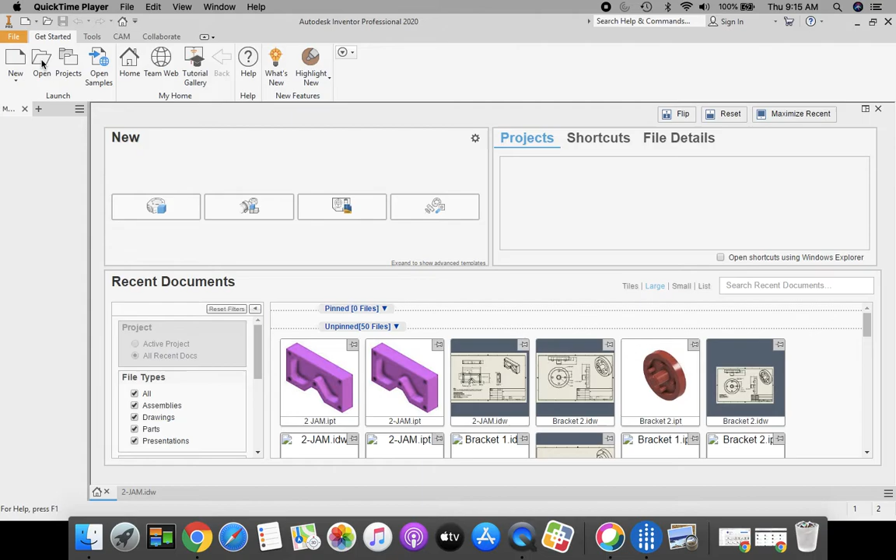Recently you just got done drawing and saving it, so we're going to have to find that in our H drive. We're going to come up to our ribbon bar and go to open. It should automatically go to our H drive, but if it doesn't identify it, come all the way down to the bottom. You want your first initial, last name, 000, that gray box with the green line underneath selected for our H drive. Scrolling down towards the bottom, we should find our 2-jam part in there, and we're going to click open.

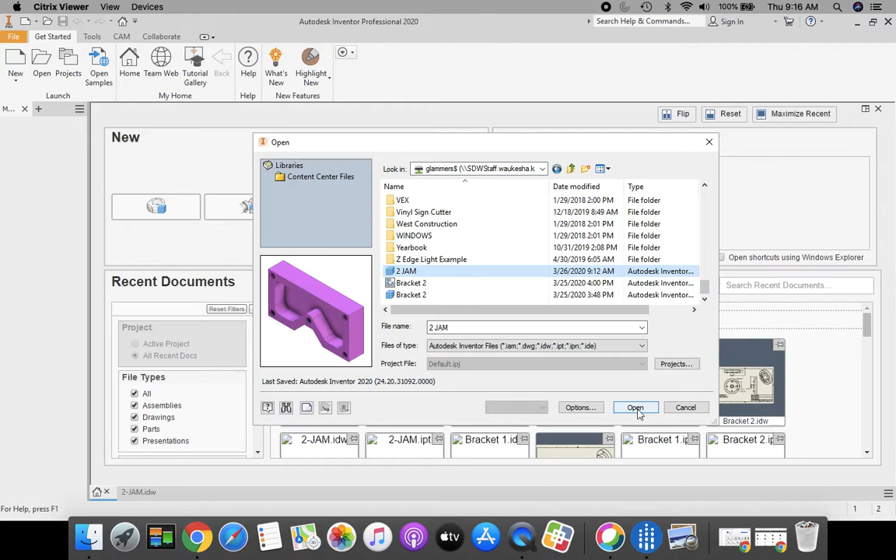Once it opens up, this is the part we just got done drawing. We're going to switch over to our CAM tab. If you look up here at the top above our ribbon bar, we are on our 3D model tab right now. We're going to come across to our CAM tab.

Once we're in our CAM tab, the first thing we need to do is set up this part for cutting, so we're going to go to our setup folder. Each one of these tabs we're going to work across from left to right, and in each tab we're going to take a look at the inside and the things that we need to change.

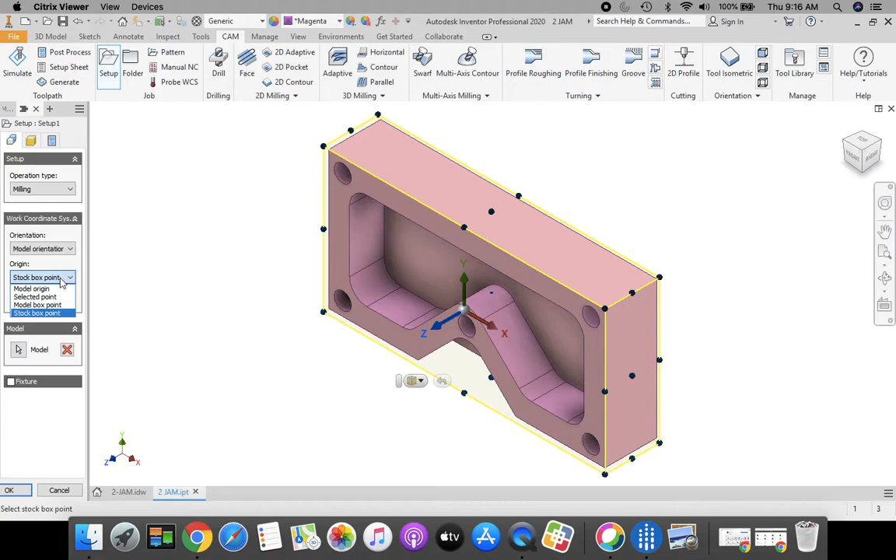In our first tab on the left hand side, we need to change our origin. You see that our origin is identified in the middle here, so we're going to change it from stock box point to the model origin. That throws it down into the lower left hand corner where we're starting for our origin on our part.

Next we're going to move across to our stock tab. Do you see how this box is outside of our actual model area? So we're going to change the stock offset mode to no additional stock, and that brings it right up close to the edge.

Then we're going to change over to our third tab for post-processing. We're going to highlight the area that says 1001, and you're going to enter in 2-jam as the name of the part, and then your last name. So 2-jam and your last name. Once you're finished with that, select OK from the menu at the bottom.

Next we're going to take care of these holes first and drill these holes. In order to do that, from our menu we're going to select our drilling operation.

Once again, these tabs we're working across from left to right, and each tab from top to bottom. So let's go to our tool. We need to select our tool.

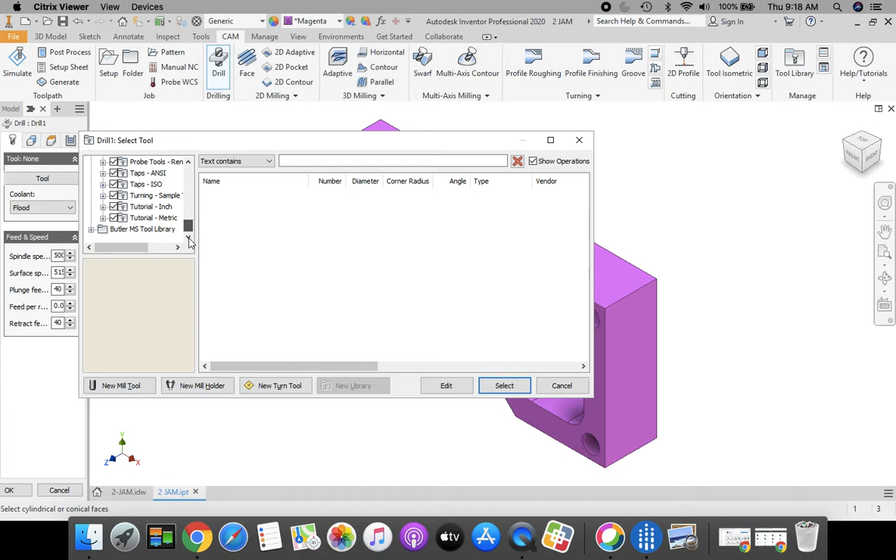Earlier this year we entered into a folder, and we have this Butler MS tool library. I scrolled all the way down to the bottom to find it. If you don't have this entered in here, not a big deal. You go back up to the top and you want to find sample libraries and go to end mills, and we're going to select tool number 2, 1/4 inch flat end mill. For those of you that do have the Butler MS tool library, same thing is in there. We want tool number 2, 1/4 inch flat end mill, and click select. That shows our end mill ready to cut our part here.

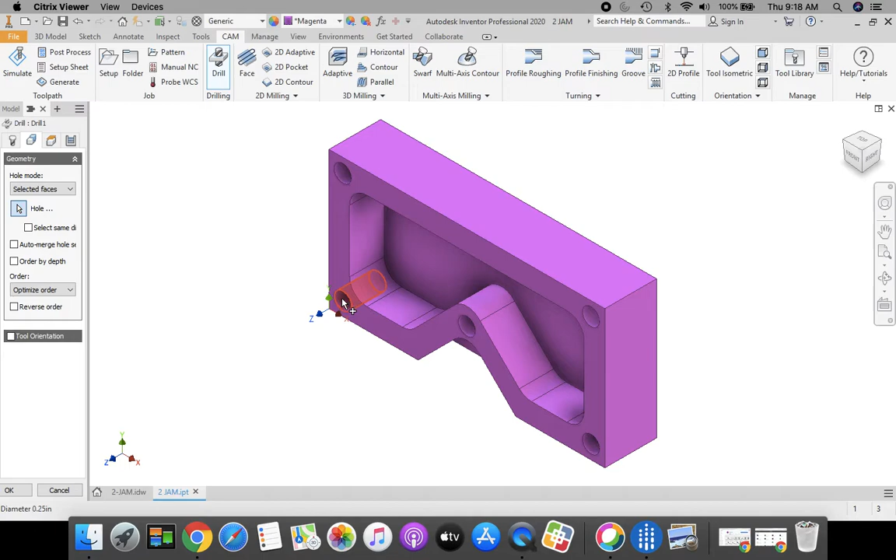Next, tab over, we're going to select our geometry, and for drilling we're going to select each one of these holes. It doesn't matter which order you click them in, because right here it says optimize order, so the computer is going to actually cut them the way it feels is going to take care of them the fastest. So we'll leave it at optimize order.

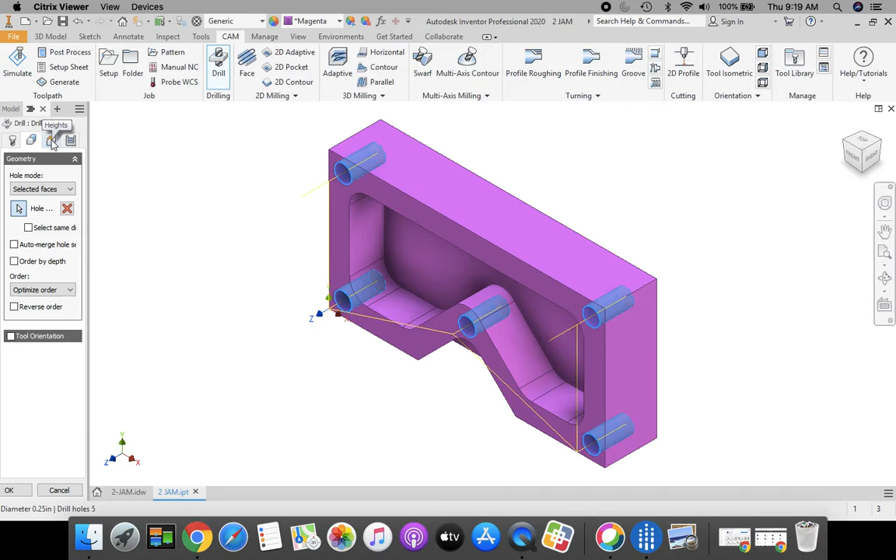Third tab over, we're establishing our heights. These top 3, I'm going to expand this a little bit so you can see: clearance height, retract height, and feed height, we're going to change all of these to model top and 0.2. Doesn't matter what they have in there right now, we're just going to change them all to model top and 0.2 for the offset.

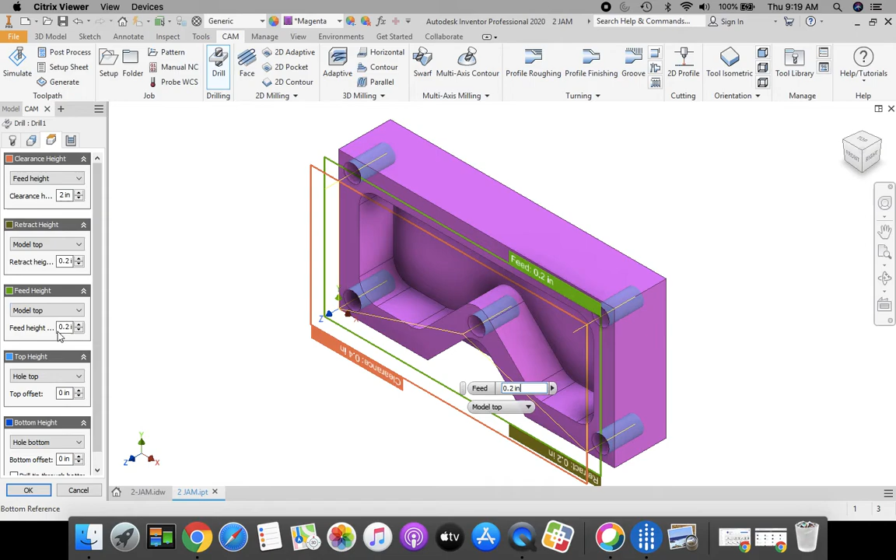Next, move on to the tab where we set cycle type. This identifies we're doing a drilling operation, and after it gets to the proper depth, it's going to rapid retract out. We'll leave it at that. When you're finished, click OK at the menu down at the bottom.

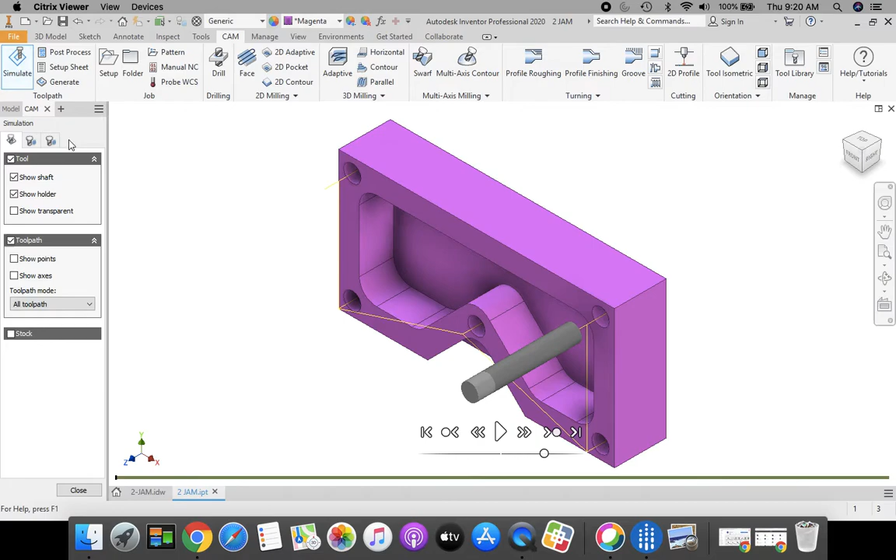That looks pretty cool. Let's see what that looks like when we simulate it. So click simulate, and we're going to turn our stock on.

Okay, that shows block is green. We're going to click play, and it's going to take care of drilling all those points for us. Pretty awesome. Okay, click close in our simulate area.

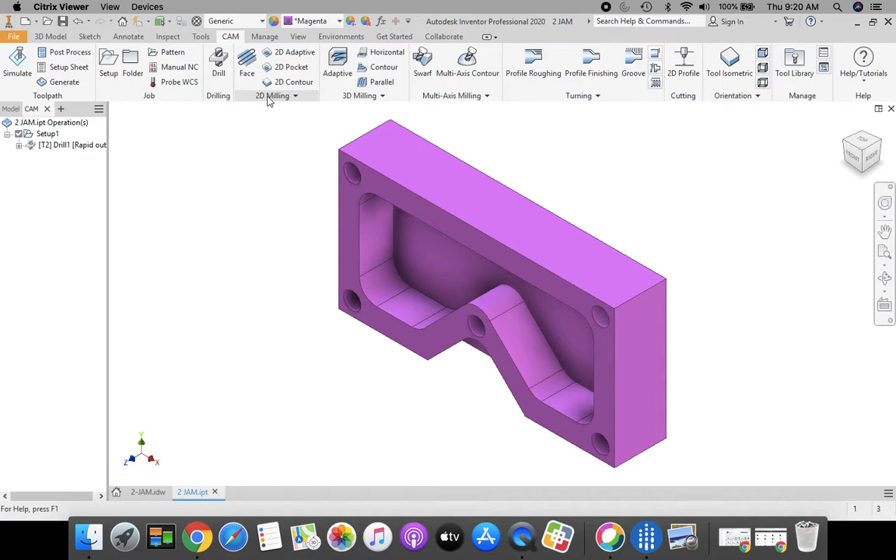Next, we're going to move on to our pocketing area. So we're going to go to the 2D milling area of our ribbon bar. 2D pocket we're going to choose.

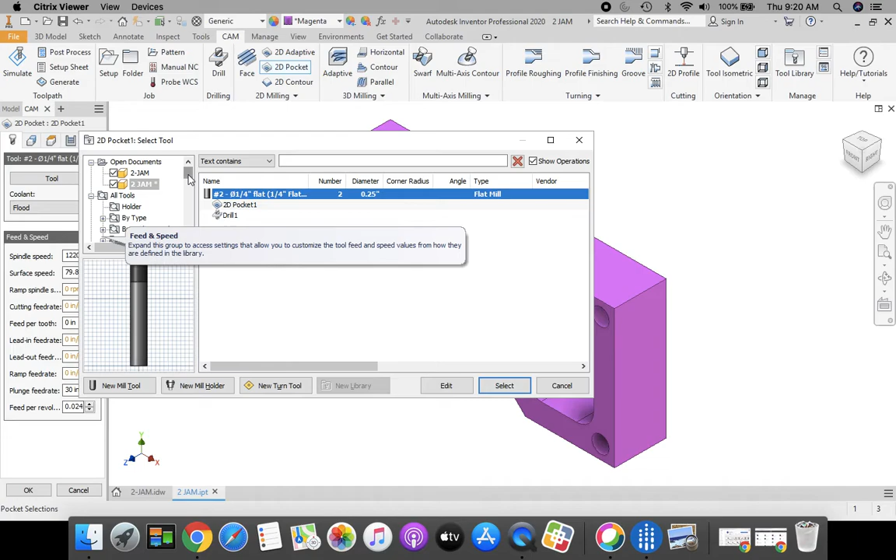When I start, the first thing I need to do is choose my tool. I know it looks like it has the correct one entered in there, but if you look at the speeds and feeds down here, you can see that we have some zero values in there. So since we already have some tools identified, we're going to click our tool button. And once again, you're going to go to Sample Libraries and Mill, or you can go all the way down to the bottom, Butler MS Tool Library, and you're going to select Tool 2, 1/4 inch flat, and click Select. See how our feeds and speeds all come in there?

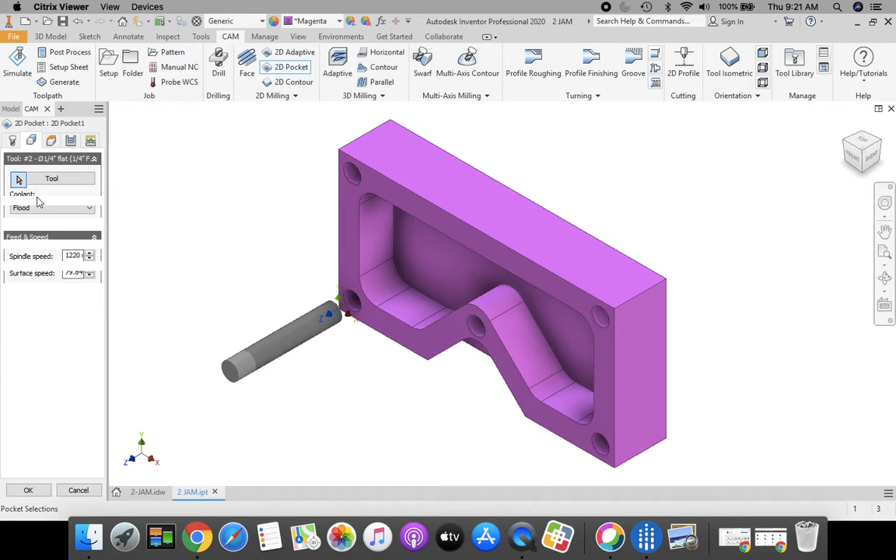Okay, now next we're going to select our geometry. We have this little triangle cut out here, and if I want to click that one first, so when I click this it doesn't automatically pop out and cover it up, I'm going to click my bottom corner of my world view cube here in order to rotate that up just a little bit. Now I can see both of these areas to pocket.

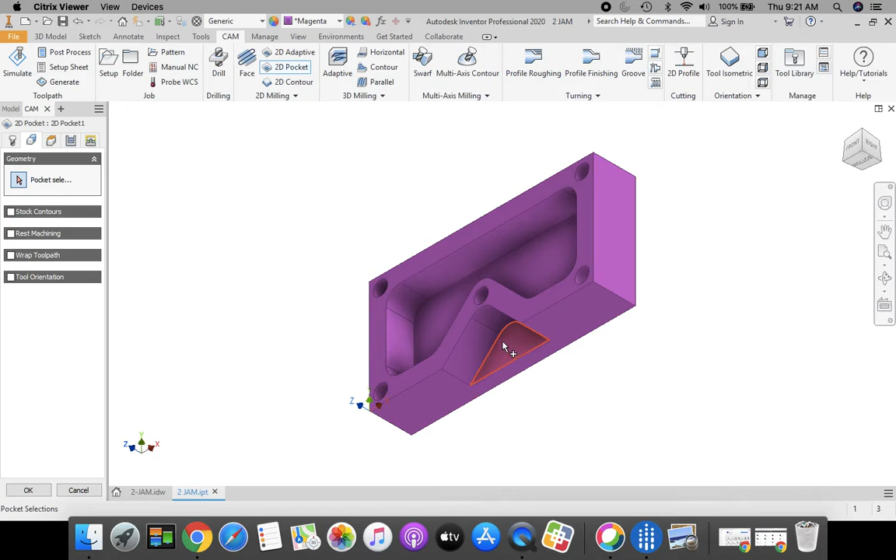Remember, when we're clicking at surface to pocket, I want that whole surface highlighted, not just the edge, the whole surface, and down in that triangle area, and then up in this little face mask looking area here as well. Okay, that looks great. I can go back home again.

Now I'm going to establish my heights. Click the next tab over. And just like our drilling operation, we're going to change all of these to model top and point 2. Okay, the top 3 we're going to model top and point 2, model top and point 2. So clearance height, retract height, and feed height are all model top and point 2.

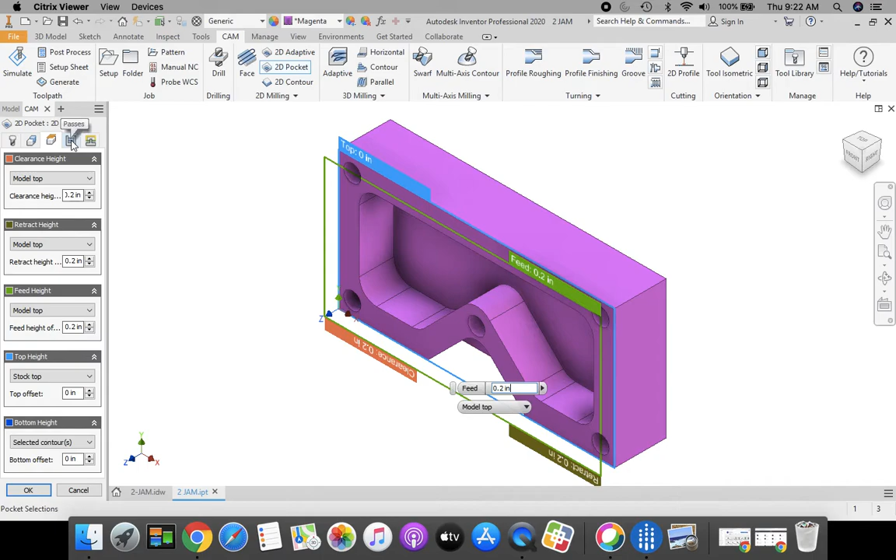Next, let's go over and take a look at our passes. Here, since we're going a depth of 0.5, a half inch deep, we need to cut this in multiple passes. So we're going to check multiple passes. Click your maximum roughing step down. If you click, it'll highlight the whole thing, and we're going to enter in a distance of 0.25. So we're going to take a 1/4 inch at a time.

Scroll down a little bit. Where it says stock to leave, I want to uncheck or deselect that box, so I cut right up to the edge of my part, my geometry.

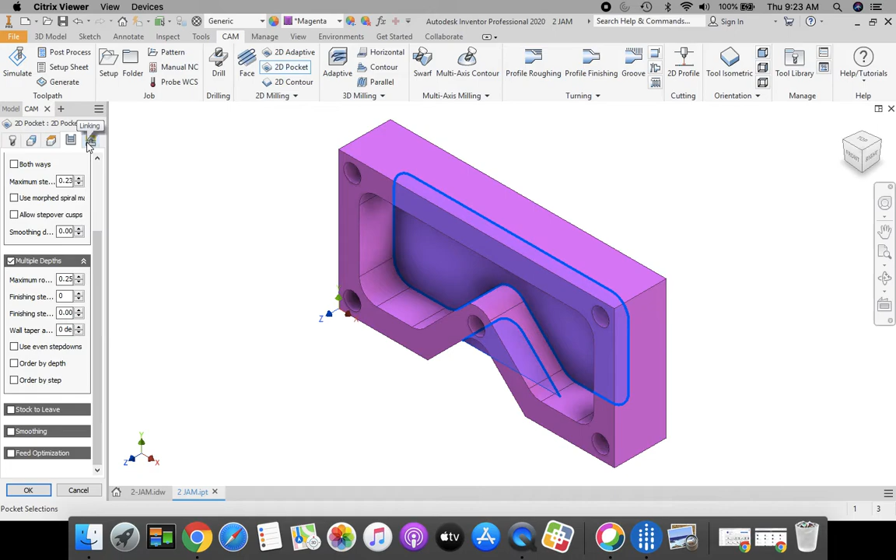Now we're going to move over to our next tab, which is our linking tab. And here we're going to uncheck lead in, transition and leads here, uncheck lead out, and our ramp style we're going to change from helix to plunge. Once you have those done, click OK.

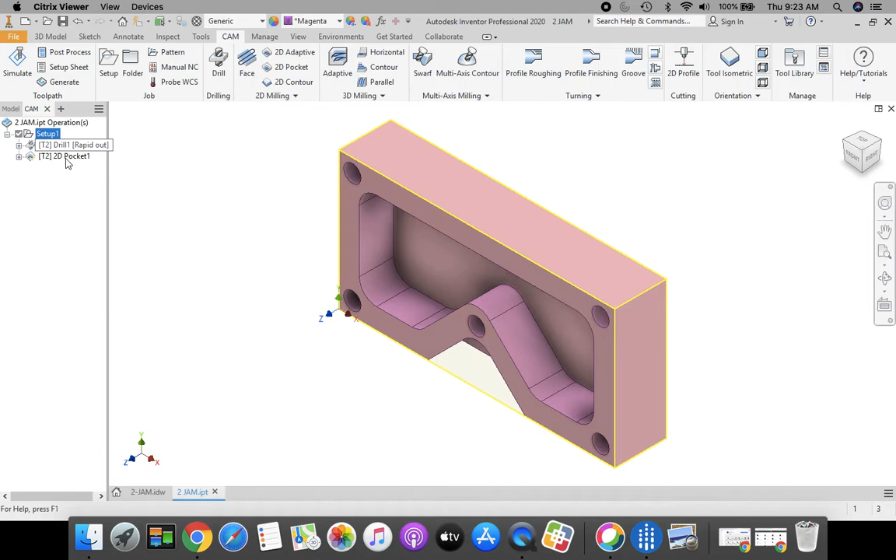It's going to generate those tool paths up here, and when it's finished, we're going to come up and we're going to select Setup 1. Okay, that is going to make us simulate both of these and choose both of these for post-processing.

Click Simulate. We're going to click Play. It's going to show us our drilling operation is going to happen first. Then it's going to take and cut out our pockets.

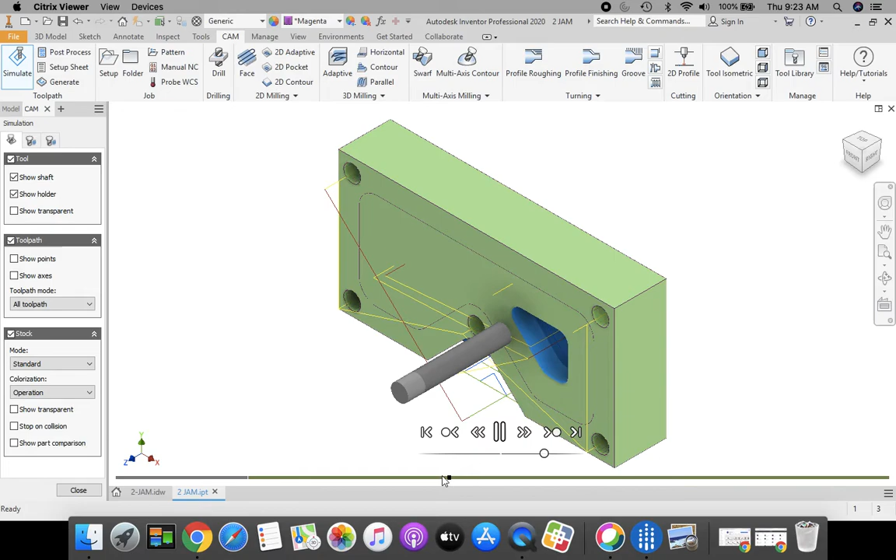Down here in the bottom area, I don't see any red, which means that we don't have any collisions or problems, so that's a good thing.

Wait for this to finish out, because we're going to screenshot this when we're done, because there's going to be an area for you to turn this in.

Okay, once you have this done, take a screenshot of this, and now you're going to turn it into Google Classroom in the appropriate area. Screenshot this. Next, once we're finished, we're going to click Close on our simulation.

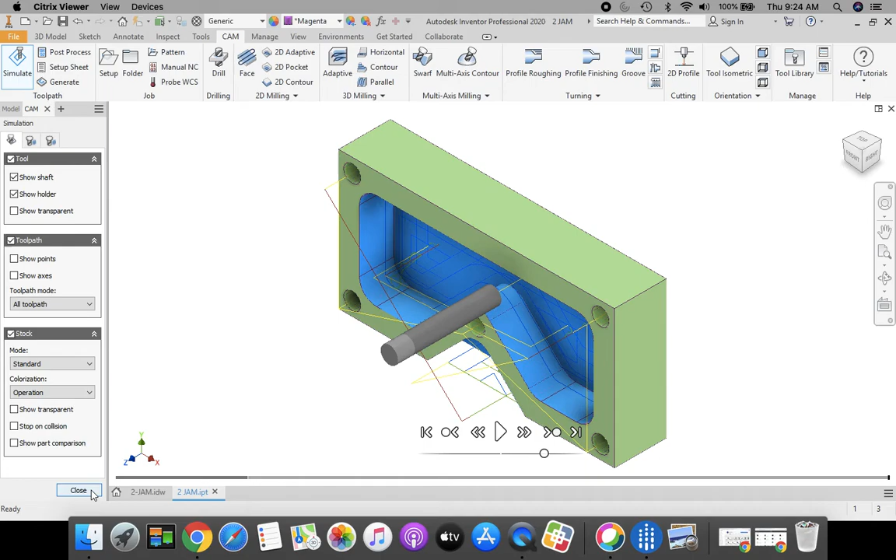We still need to post-process this. We're going to come up to the top, Post-Process. We want to make sure that this is going to our H drive. If it doesn't automatically select H colon here, you're going to click on this little gray box. You're going to make sure you're going to your H drive.

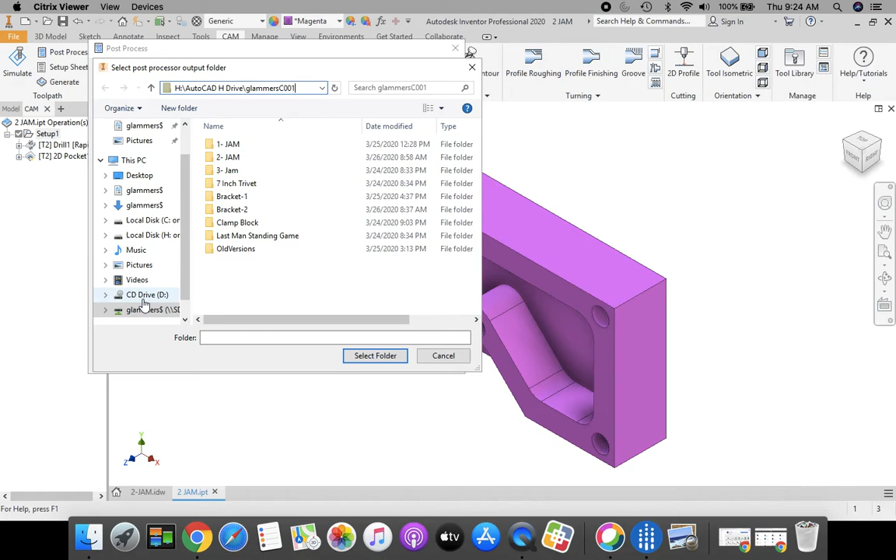Okay, from the top pull-down menu, nothing happens here. So if you take a look on the left-hand side, I'm going to my H drive. First initial, last name 001, the gray box with the green line. Select folder. It already has my part name in there, 2jam, and my last name. You're going to do 2jam and your last name if it's not in there. And then click Post. Click Save.

We're going to X out of our file editor here. Now you're all done, you're saved. Please make sure you turn in that screenshot to Google Classroom.

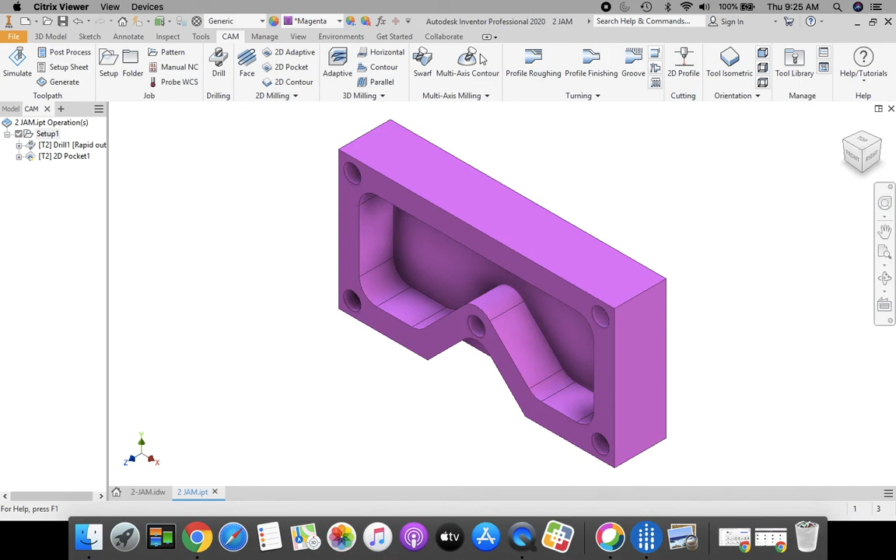I'm going to show you how to do that awesome section view for our IDW drawing. Congratulations. Move on to the IDW video next.